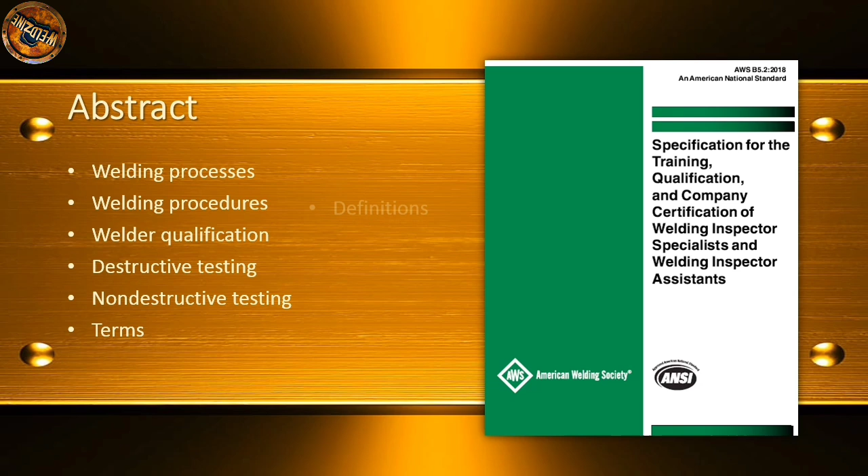The program is developed as a written practice and controlled by an employer. The qualification requires documentation of experience, training, and satisfactory completion of an examination. The examination tests knowledge of welding processes, welding procedures, welder qualification, destructive testing, non-destructive testing, terms, definitions, symbols, reports, records, safety and responsibility.

Foreword: this is the second edition of AWS B5.2. The first edition was published in 2001. Revisions in this edition were made to Clause 1 Scope, 7 Written Practices, 8 Physical Requirements, 9 Training, 10 Examination Requirements, and 11 Certification.

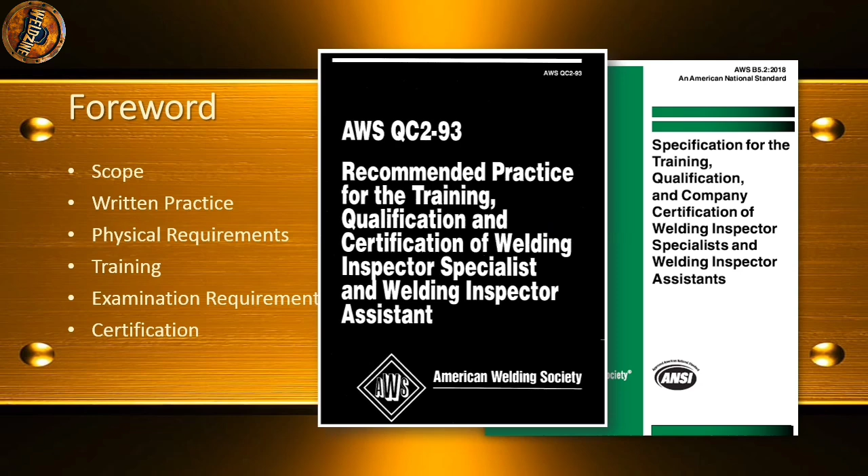The title of the standard has been revised to better reflect its scope. The changes are widespread enough that clear markup of the changes is difficult. The first edition of AWS B5.2 superseded QC2-93, Recommended Practice for the Training, Qualification, and Certification of Welding Inspector Specialist and Welding Inspector Assistant.

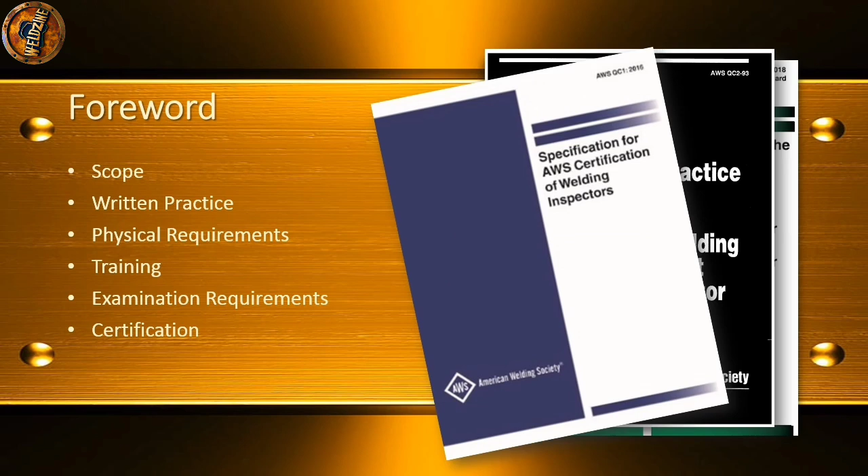AWS B5.2 provides the framework for an in-house certification program and written practices for welding inspectors. To differentiate it from the central certification program of AWS supported by the AWS B5.1 and QC1 standards, B5.2 uses the nomenclature welding inspector specialist.

The specification for the qualification of welding inspector specialist and welding inspector assistant was developed to provide a qualification basis with defined minimum requirements for welding inspector specialists to demonstrate competence through a combination of education, experience, and examination.

Scope: This specification establishes the minimum requirements for an employer company's internal written practice for the training, qualification, and that company's certification of welding inspector specialists and welding inspector assistants. The employer is responsible for the testing, examination, and qualification of their inspectors.

This specification is to aid employers in identifying the basic factors in qualifying personnel performing welding inspection for a specific company or project. In developing the written practice, Clause 7, the employer shall review the detailed recommendations presented herein and incorporate them into the practice as applicable.

Examination and certification by the American Welding Society (AWS) shall not be a requirement for the welding inspector specialist, nor is there reciprocity between a welding inspector specialist or welding inspector assistant and AWS Certified Welding Inspector (CWI) or Certified Associate Welding Inspector (CAWI) in accordance with AWS QC1 Specification for AWS Certification of Welding Inspectors.

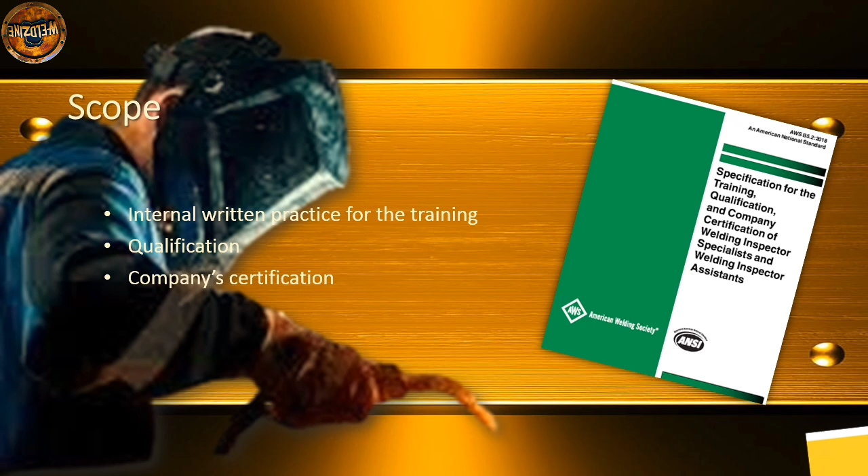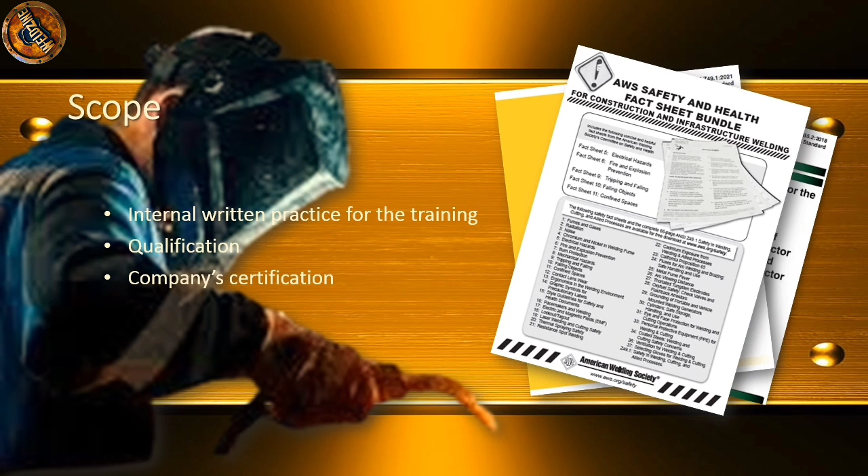Safety and health issues and concerns are beyond the scope of this standard and reference, and are therefore not addressed herein. Safety and health information is available from the following resources: American Welding Society AWS ANSI Z49.1, Safety in Welding, Cutting and Allied Processes, AWS Safety and Health Fact Sheets, and other safety and health information on the AWS website.

Material or equipment manufacturers: safety data sheets supplied by the materials manufacturers, operating manuals supplied by the equipment manufacturers, and applicable regulatory agencies. Work performed in accordance with this standard may involve the use of materials that have been deemed hazardous and may involve operations or equipment that may cause injury or death.

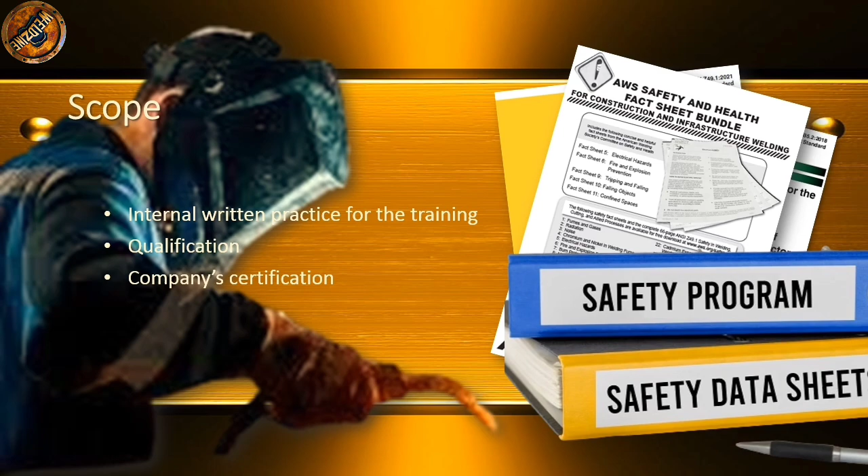This standard does not purport to address all safety and health risks that may be encountered. The user of this standard should establish an appropriate safety program to address such risks as well as to meet applicable regulatory requirements. ANSI Z49.1 should be considered when developing the safety program.

References. Normative references: the following documents are referenced with their publications and are mandatory to the extent specified herein. For undated references, the latest edition of the reference standards shall apply. For dated references, subsequent amendments to or revisions of any of these publications do not apply.

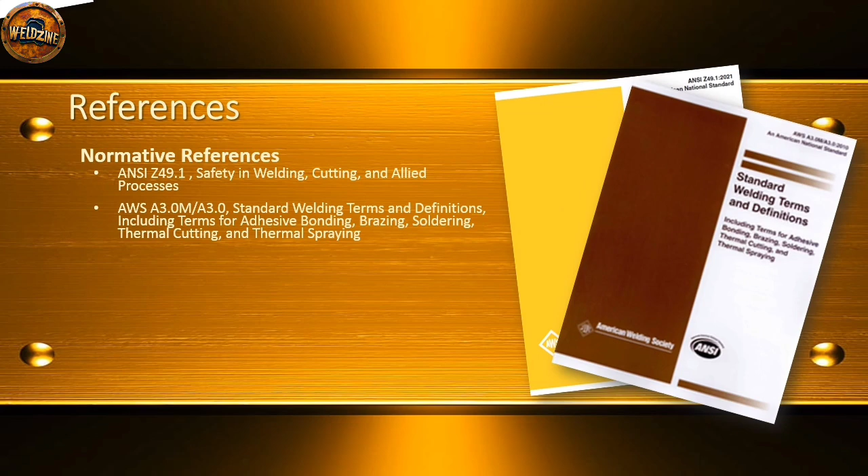ANSI Z49.1, Safety in Welding, Cutting and Allied Processes. AWS A3.0M/A3.0, Standard Welding Terms and Definitions Including Terms for Adhesive Bonding, Brazing, Soldering, Thermal Cutting and Thermal Spraying. AWS A2.4, Standard Symbols for Welding, Brazing and Non-Destructive Examination. AWS B5.1, Specification for Qualification of Welding Inspectors.

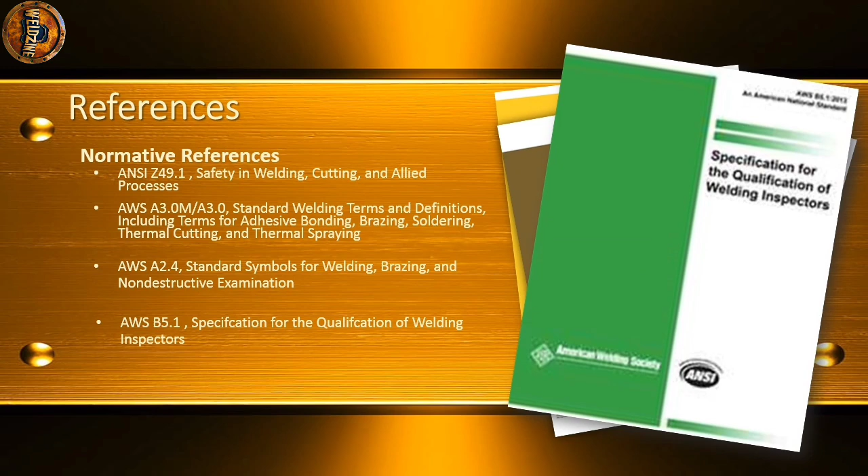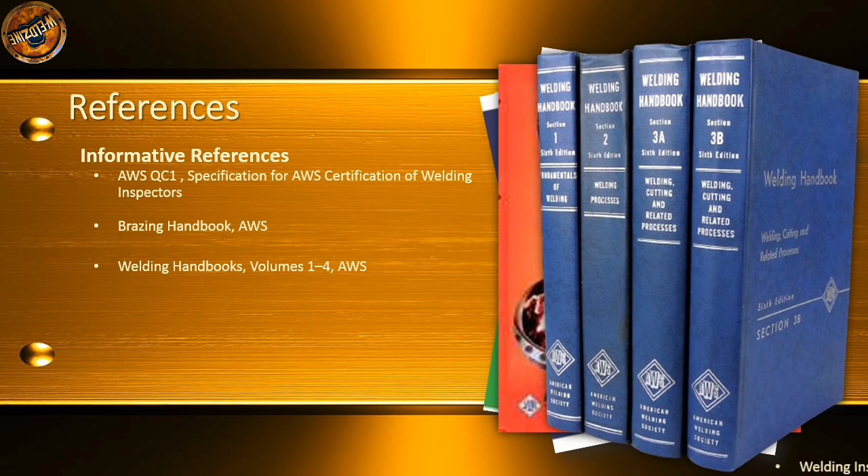Informative references: AWS QC1, Specification for AWS Certification of Welding Inspectors. Brazing Handbook, AWS. Welding Handbooks Volume 1 to 4, AWS. Welding Inspection Handbook, AWS. Terms and definitions.

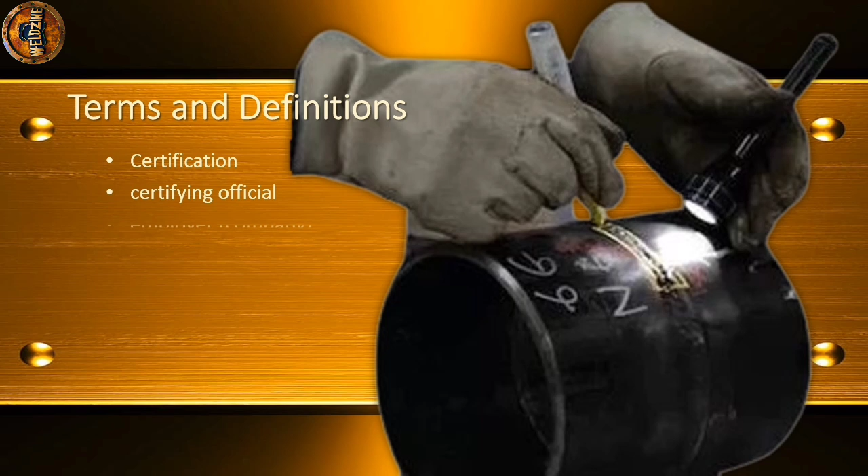For the purpose of this document, the following terms and definitions apply. Certification: the act of determining, verifying, and attesting in writing to the qualification of personnel or organizations in accordance with specified requirements. Certifying official: the employee of the company who is designated to certify inspectors and revoke certification. Employer company: the corporate, private, or public entity that employs personnel for wages, salary, fees, or other considerations.

Qualification: demonstrated training, skill, knowledge, and experience required for personnel to perform the duties of a specific job or function, typically demonstrated by passing a performance test.

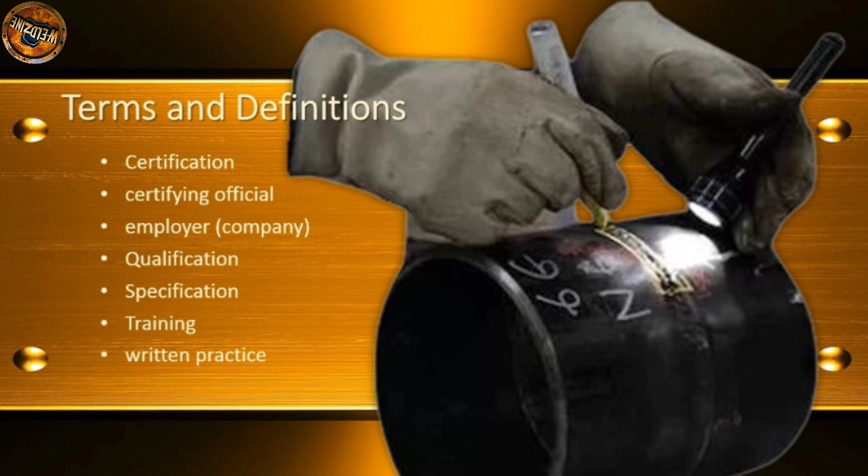Specification: document stating requirements. Training: an organized program developed to impart the knowledge and skills necessary for qualification. Written practice: a document to specify methods, requirements, examination records, certifying official. It is for a company's welding inspection personnel certification program.

Level of qualification. There are two levels of welding inspector qualification defined in this document: welding inspector specialist and welding inspector assistant. A welding inspector specialist is an individual who has been qualified by the employer as meeting the requirements of the employer's welding inspector qualification program.

Welding inspector assistant: a welding inspector assistant is an individual who has been qualified by the employer as meeting the requirements of the employer's program to assist the welding inspector specialist in performing the defined duties. The welding inspector assistant shall perform inspection duties under the supervision of a welding inspector specialist.

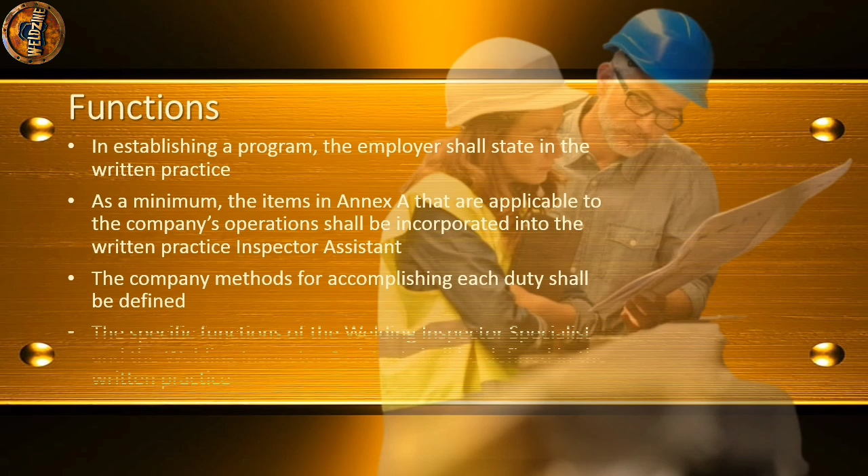Functions. In establishing a program, the employer shall state in written practice the specific functions to be carried out by the inspectors. As a minimum, the items in Annex A that are applicable to the company's operations shall be incorporated into the written practice. The company's methods for accomplishing each duty shall be defined. The specific functions of the welding inspector specialist and welding inspector assistant shall be defined in the written practice.

Annex A, body of knowledge. A1, introduction. A1.1, capabilities: judges quality, interprets specification limitations and intent, communicates results and makes reports to supervisor. A1.2, qualifications: physical condition, vision, knowledge of welding, knowledge of drawings, specifications, specific codes and procedures used by employer, knowledge of testing methods, experience, education and training.

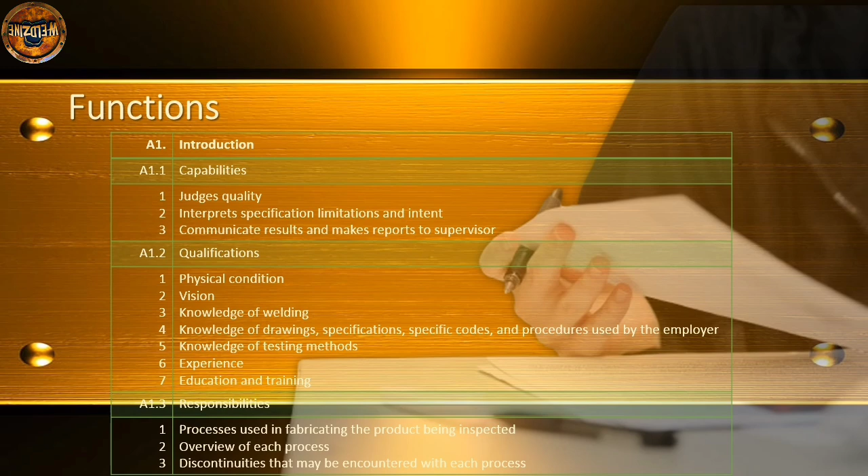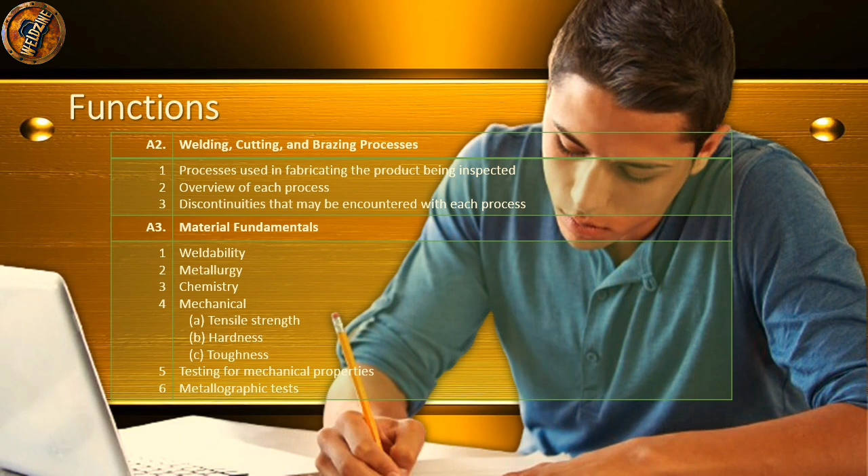A1.3, responsibilities: general, specific company responsibilities, personnel and company safety practices. A2, welding, cutting and brazing processes: processes used in fabricating the product being inspected, overview of each process, discontinuities that may be encountered with each process. A3, material fundamentals: weldability, metallurgy, chemistry, mechanical properties such as tensile strength, hardness and toughness, testing for mechanical properties, metallographic tests.

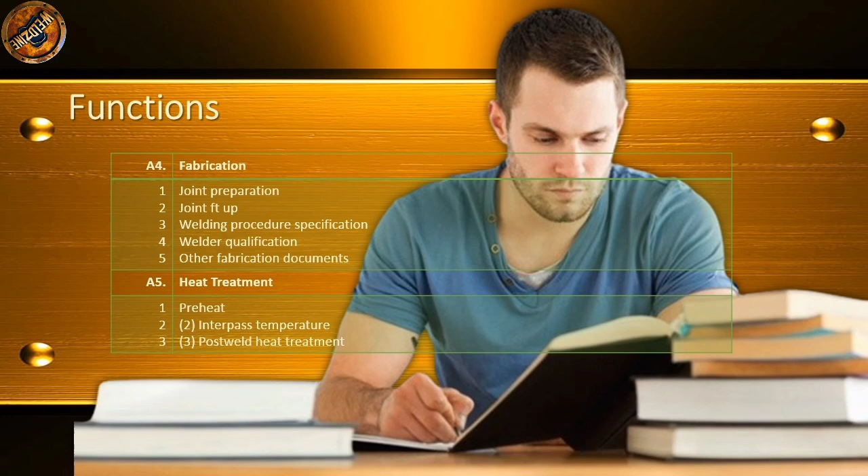A4, fabrication: joint preparation, joint fit up, welding procedure specification, welder qualification, other fabrication documents. A5, heat treatment: preheat, interpass temperature, post weld heat treatment (PWHT). A6, non-destructive examination.

1, visual inspection: application and acceptance standards, tools and their use. 2, liquid penetrant testing: procedures, acceptance standards. 3, magnetic particle testing: acceptance standards, procedures. 4, other testing and inspection: 100% sampling, random sampling, radiographic, ultrasonic. 5, specific company procedures.

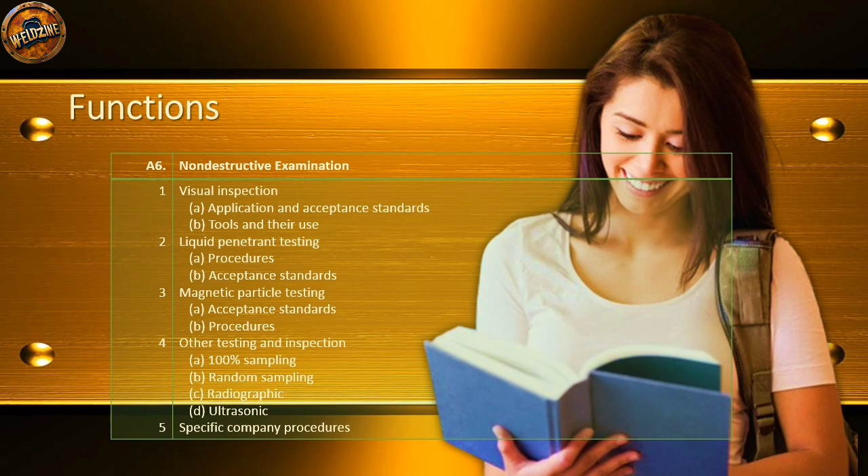A7, inspection documentation: verify dimensions, verify written welding procedures, verify welder qualification papers, review NDE reports, prepare narrative reports. A8, references.

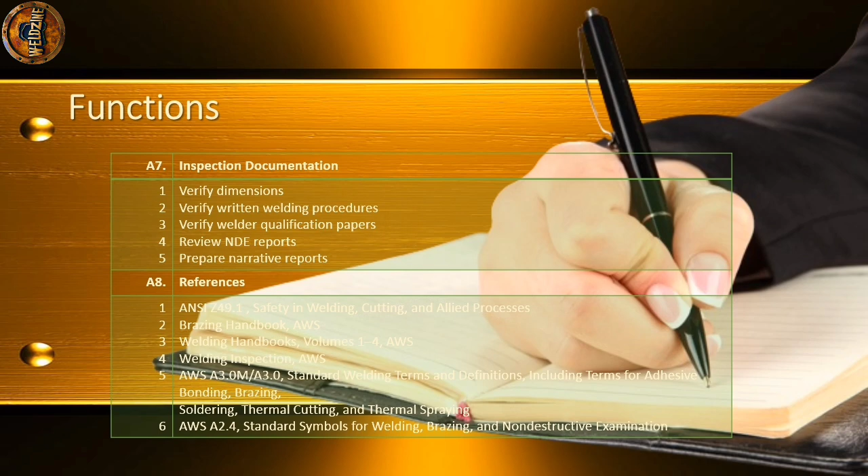ANSI Z49.1, Safety in Welding, Cutting and Allied Processes. Brazing Handbook, AWS. Welding Handbook volumes 1 to 4, AWS. Welding Inspection, AWS. AWS A3.0M or A3.0, Standard Welding Terms and Definitions, including terms for adhesive bonding, brazing, soldering, thermal cutting and thermal spraying. AWS A2.4, Standard Symbols for Welding, Brazing and Non-Destructive Examination.

Education and experience. The following are minimum requirements for each candidate for welding inspector specialist. The candidate shall be a high school graduate or hold an approved general equivalency diploma. As an alternative to the requirements in 6.1.1, the employer may accept additional years of experience in lieu of the education requirements. The candidate shall have no fewer than 5 years experience in an occupational function that has direct relationship to the weldments being fabricated to a specified code or other standard or contract, and shall be directly involved in one or more of the following situations:

Design: preparation for plans and drawings for weldment construction. Production: planning and control of welding operations such as procedures, equipment, materials, or personnel involved in weldment fabrication. Construction: performance of welder, fitter, or other functions in fabrication or erection of weldments. Inspection: detecting and measurement of weld discontinuities or verification of fabrication requirements.

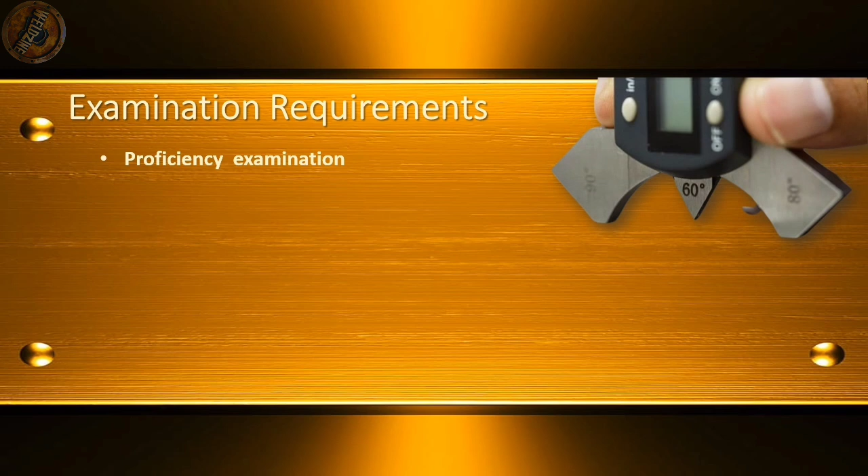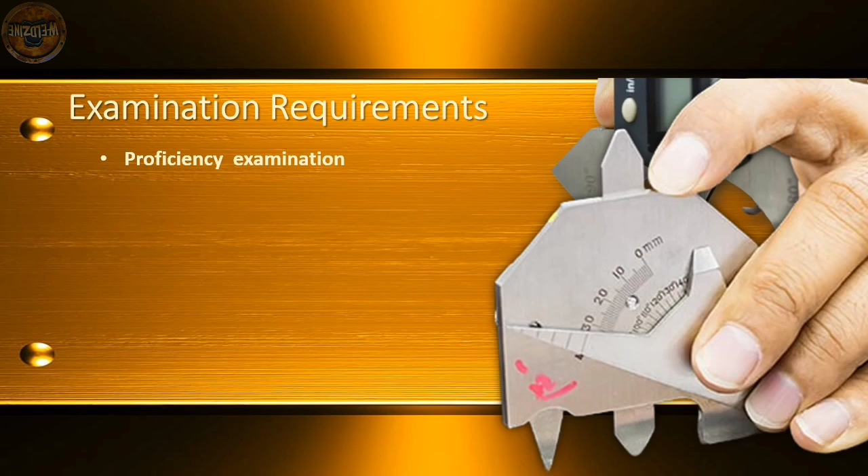Examination requirements, proficiency examination. The employer shall conduct initial examinations for new candidates and periodic updates for previously qualified inspectors. The examination shall incorporate checkpoints or proficiency demonstrations to verify that individuals possess the ability to perform specific inspections and interpret results. Verification that candidates met the minimum requirements of these standards shall be a permanent part of the employee's records.

Welding inspector specialist examination. The employer shall structure a test consisting of 3 parts as defined below. Candidates shall achieve a minimum passing score as determined by the employer for each of the 3 parts. A minimum passing score of 70% or higher for each of the 3 parts is required. The recommended examination shall consist of an open book test on industry standards or contracts applicable to the employer, a closed book test on welding fundamentals including safety, and a test on practical application of welding inspection. See Annex A for recommended body of knowledge.

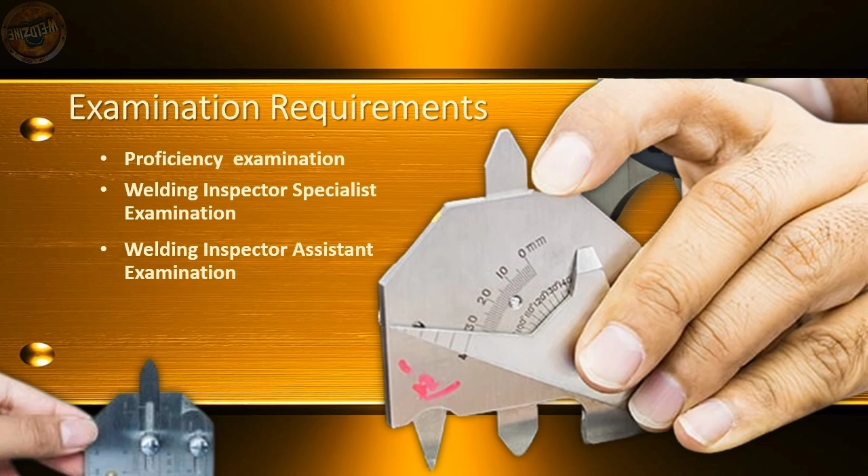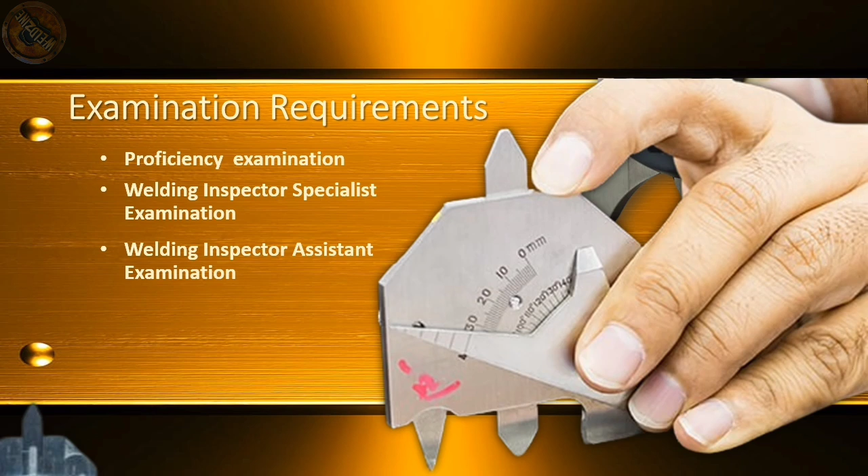Welding inspector assistant examination. The employer shall structure a test consisting of 3 parts as defined below. Candidates shall achieve a minimum passing score as determined by the employer for each of the 3 tests. A minimum passing score of 70% or higher for each of the 3 parts is required. The recommended examination shall consist of an open book test on industry standards or contracts applicable to the employer, a closed book test on welding fundamentals including safety, and a test on practical applications of welding inspection. See Annex A for recommended body of knowledge.

Third party agencies. At the option of the employer, an outside agency may be engaged to provide assistance in training, qualification, and examination services. In such instances, the employer is responsible to ensure that training, qualification, and examination requirements are in accordance with this document.

Certification. It is the employer's responsibility to certify the welding inspector specialist and welding inspector assistant meet the requirements of the company's written practice. Course outlines and certification records shall be maintained on file by the employer and shall contain records of the certified individual and copies of written practices as required by Clause 7.

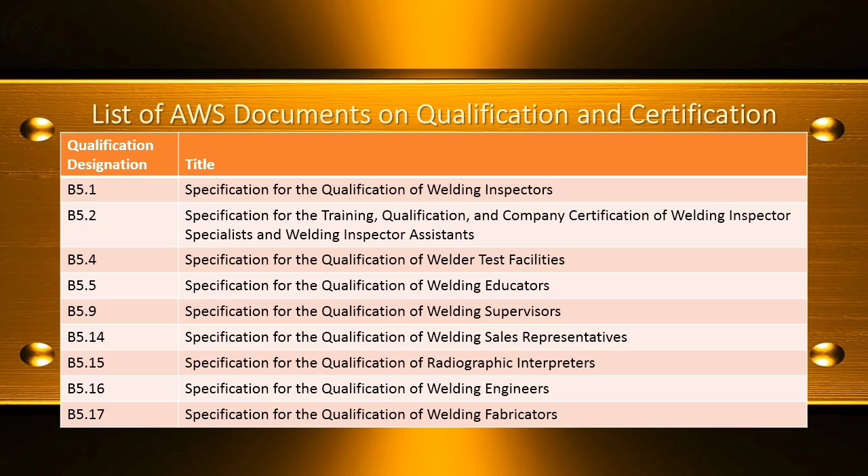According to Annex A, informative, following is a list of AWS documents on qualification and certification.